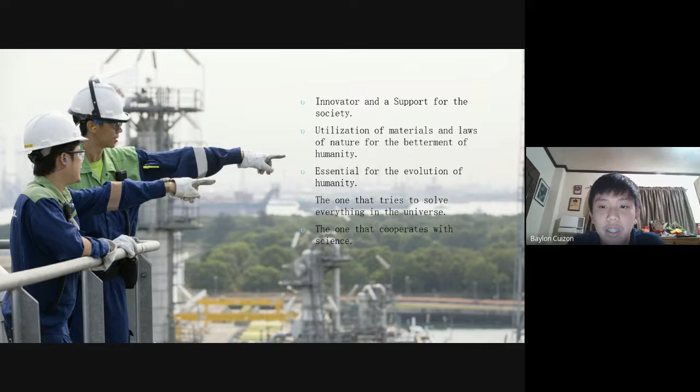Engineering is a way of life that boosts our way of life through its inventions and equipment. Engineering is the one thing that tries to solve most of the problems in the universe by knowing the problems and experimenting on them to find a solution. For them, engineering is a utilization of materials and laws of nature for the betterment of humanity, and an essential for the evolution of humanity that cooperates with science.

Good afternoon, sir. I'm Dixon Yangorete. Engineering for me is the application of creative ideas, where it can be done individually or with the help of other people. Engineering from the beginning has been very essential throughout the evolution of humanity.

Even in its early days, it was a big help to build civilization and nations for people to be able to survive. Mechanical engineering is a branch of technology that is used to build and design machines that are very useful for our everyday life.

Today, mechanical engineering keeps evolving, unlike 100 years ago, where people had limited ideas and limited resources. Mechanical engineering is a subfield of engineering that focuses on constructing and fixing machines that are very useful in our everyday life. It is our job as mechanical engineers to ensure that every machine works 100%.

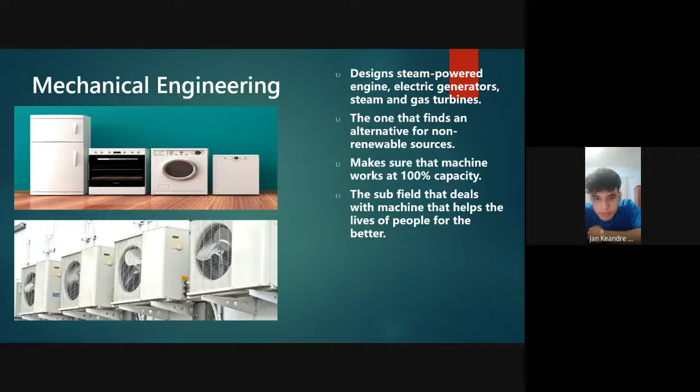Civil engineering is a professional engineering discipline that deals with the design, construction, and maintenance of the physical and naturally built environment, including public works such as roads, bridges, canals, dams, airports, sewerage systems, pipelines, structural components of buildings, and railways.

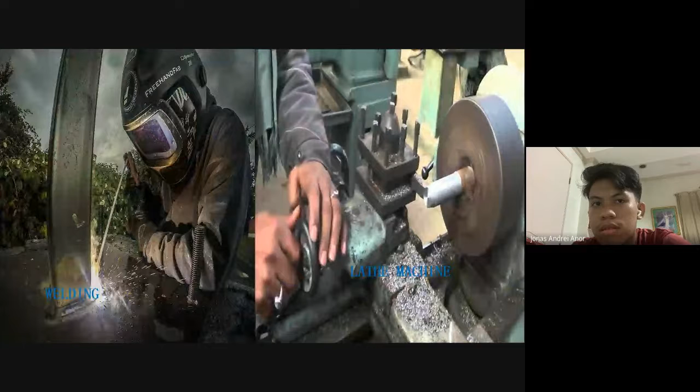Welding and using the lathe machine are the two skills that we acquired for enrolling in this course, mechanical engineering. And these are the great inventions of mechanical engineering.

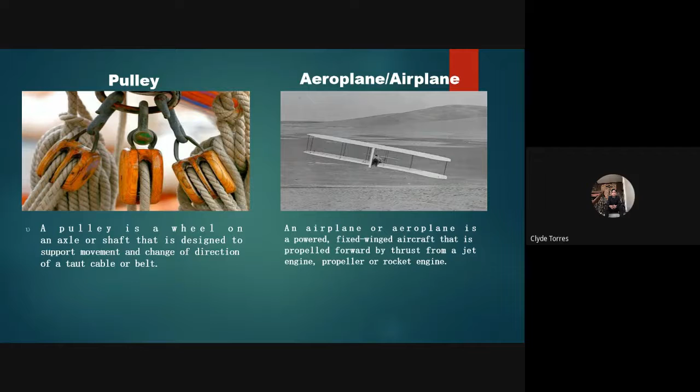First one is the pulley. It is a wheel on an axle or shaft that is designed to support movement and change of direction of a taut cable or belt. We often see this invention in cargo ships to transport a container from one place to another.

It is also used in elevators to move us from top to bottom, or transport us from bottom to top.

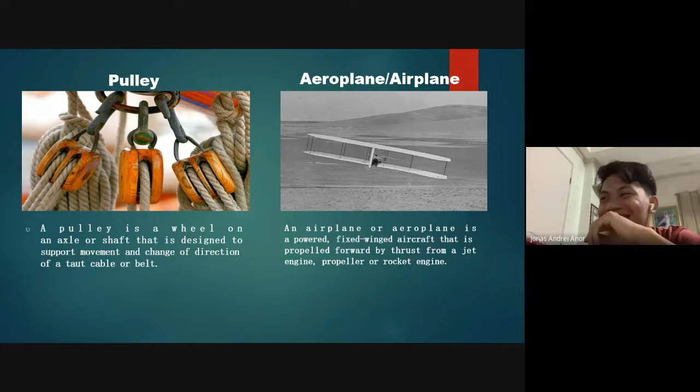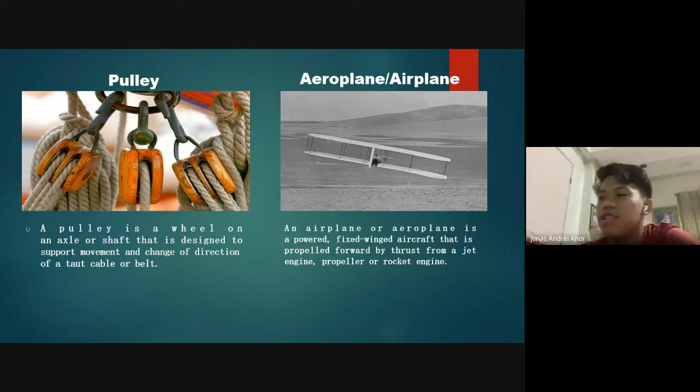Next is the airplane, or aeroplane, which is a powered aircraft that is propelled forward by thrust from a jet engine, propeller, or rocket engine.

Next is the steam locomotive. A steam locomotive is a type of railway locomotive that produces its pulling power through a steam engine. These locomotives are fueled by burning combustible materials, usually coal, wood, or oil, to produce steam in a boiler. This invention was used in the Industrial Revolution.

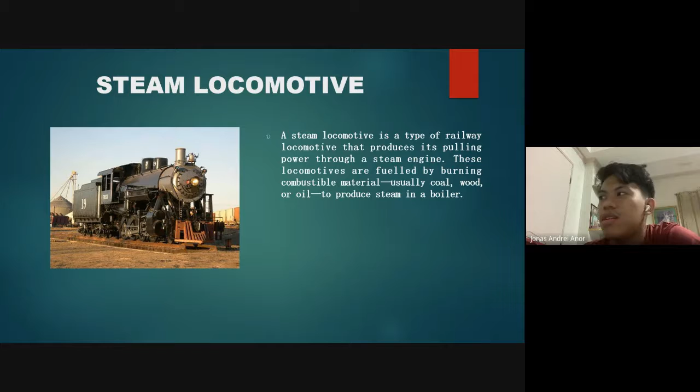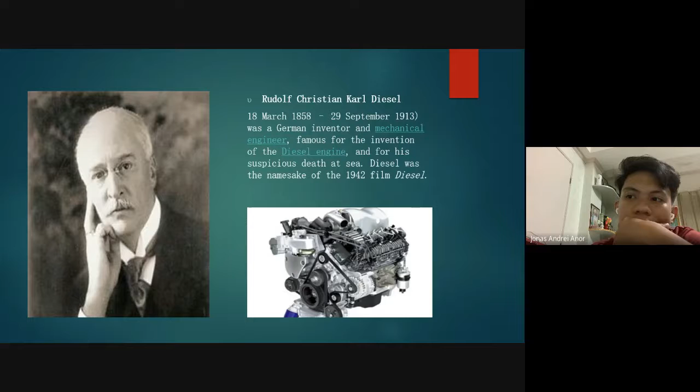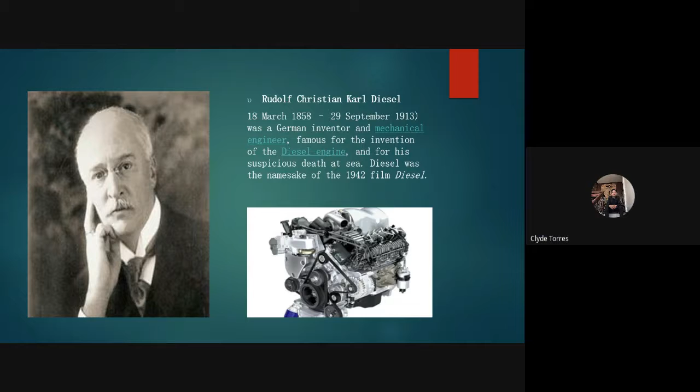Air conditioning is one of our major concerns as mechanical engineers. Next one is Rudolf Christian Karl Diesel, a German inventor and mechanical engineer, famous for the invention of the diesel engine, which is used in our cars nowadays.